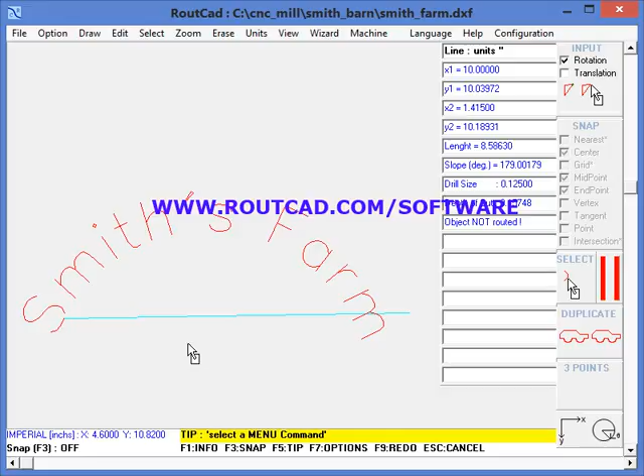There is a line over here that we don't need. We're going to erase it. We go to Erase Object and we erase that line.

Now we can see this is missing a little bit of a line over here, so we're going to zoom into that area and we will go to Draw Line.

We'll be using 2-point and the mouse, and we're going to press F3 to enable the snap, and we have endpoint selected. So we're going to go from this point to that point to correct the mistake.

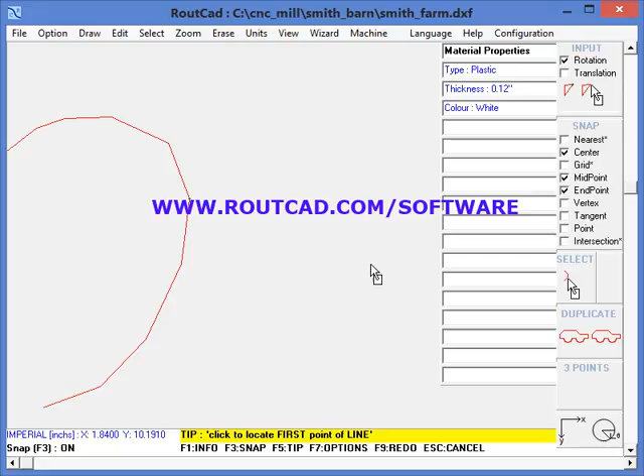Now we zoom out again. Now this is all good. We got our Smith's Farm over there.

This is perfect, but we wish to add a little symbol of a horse in the middle. To do that, we have already drawn in RoutCAD a small horse, and we will be bringing it back into that drawing. It's quite easy.

We're going to go to File and we're going to merge that horse that we did before, so we're going to click on Open. Now it is not important if we merge before the first route or after, because we have not yet defined the routing information in this drawing.

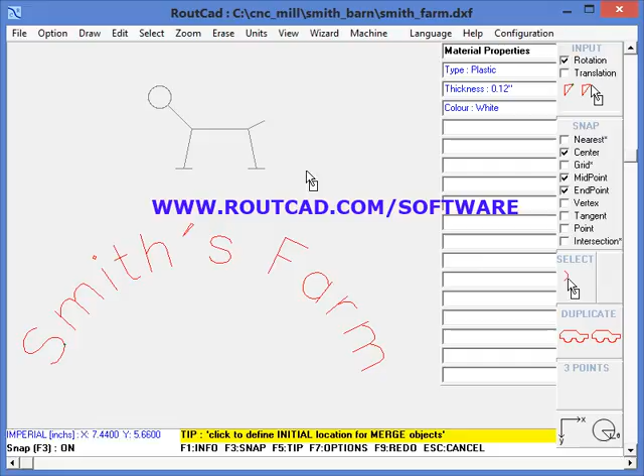So we're just going to click on Yes. This is where it's putting the horse. What we need to do: now the horse is gray, which means that location is temporary.

So what we'll do is use the mouse and disable the snap. We're going to click a first point and drag that little horse in the middle somewhere.

Now we are quite happy with this, but we want to add an extra feature to that horse. We would like to add a small seat over here.

We can just go to Draw Line, and we're going to press F3 to enable the snap, and we will be drawing a line that goes in that direction.

Now to be more accurate, we could have used the snap or the grid, but this is just a quick thing, so we will not be using the snap or the grid.

We're just going to snap to the middle, drag the mouse to go in a vertical line, press F3 to disable the snap, and then click again.

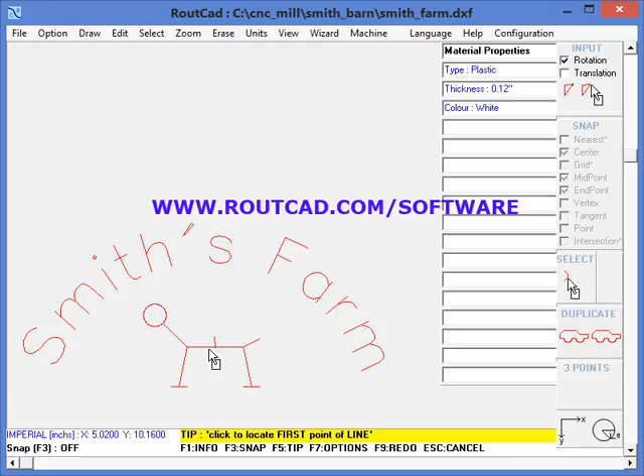So now we made a seat. It is not straight, but as I said, we're not trying to do something accurate for this particular thing. We just want to do a quick thing.

But if we wish to do something accurate, let's do it. We can go to the grid, and we're going to increase the grid to, let's say, 0.5 inch.

Now, what we can do is move that drawing in such a way to put it at a grid point to allow us to draw more accurately.

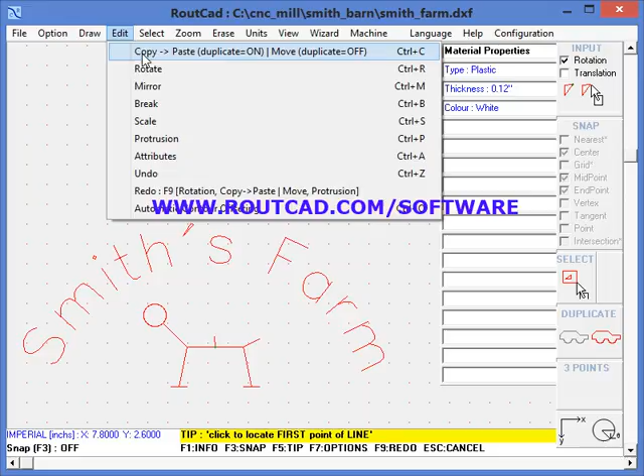Let's do that. What we do is cancel the duplicate, so we will not be duplicating what we are doing. We're going to select window, and we're going to copy. We're going to copy all of that, so we're going to click on Copy and select a window to copy.

Now we're going to press F3 to enable the snap again, and we're going to select the endpoint of this line. Now we're going to go back and put on grid, and we're going to put it at a grid point. So what we've effectively done is put one endpoint of that horse at the grid point to allow us to draw more accurately using the grid. It's quite a simple thing.

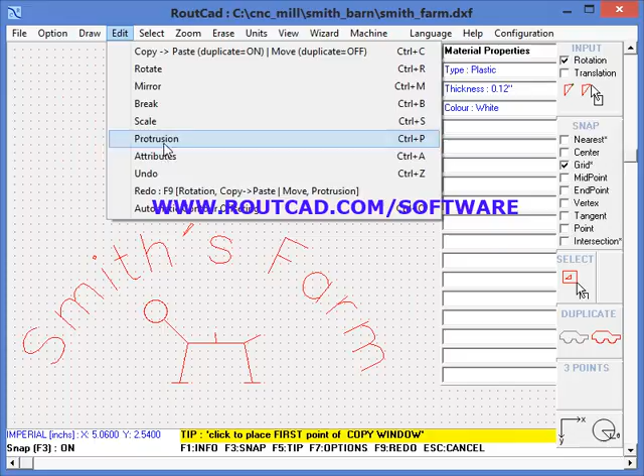We could even increase or decrease the grid if we wish to make it a little bit smaller. Now we're going to erase what we did before, erase object. And we're going to draw another line, but this time using the grid, which allows us to be a little bit more accurate. So we're going to go straight this way, and then we're going to make a seat like that.

Quite simple thing. Okay, now we have made the sign we were looking for, and we are happy with it. So the next step is to make sure we define what type of material we want to machine this out of. We will machine this out of plastic.

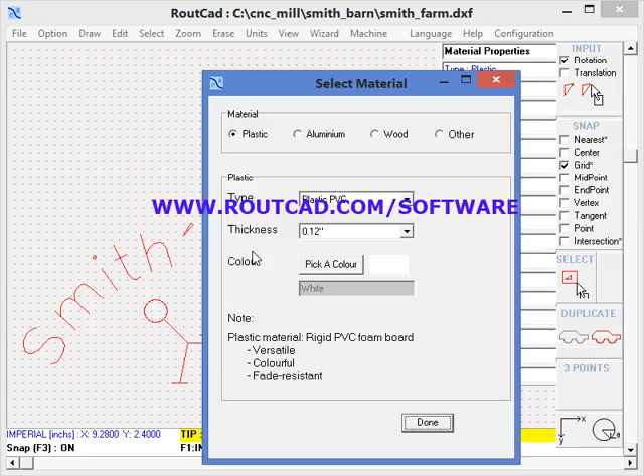Material selection, we're going to get plastic, 0.12 inch thick. That's good. Now we're going to make sure our depth of cut is defined properly. We have depth of cut 0.157, and our tool diameter is 1/8 of an inch. So everything seems to be good.

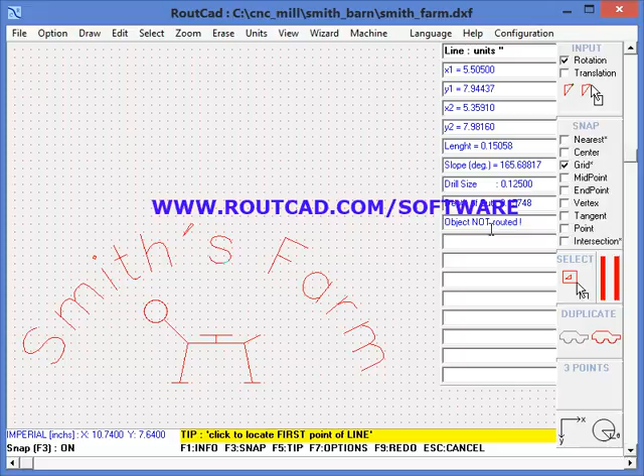Now we're going to make sure this drawing has the proper attributes, and we can see that the depth of cut is not the correct one. Here it's okay, 0.15, but here it's not okay. So all we need to do is edit attributes and select the whole thing. Now all the attributes have been changed.

Now we are ready to route or machine this. We could machine it one element at a time, or define the machining sequence all at once. To be more accurate, it's better to go one at a time, and then do the letters and everything like that. But in this case we want to do something quickly, so we will define the machining sequence all together. All we have to do is go to machine, and select route semi-automatic.

And we have the window selected already. So now all we need to do is select all of that, and then RoutCAD will machine it for us. Now, mind you, now it has been routed, so all that we see will be machined by the CNC, and the width of this object represents the 1/8 inch tool diameter.

Now, as I said, this was a quick way to machine it, but to be more accurate, we can select one element at a time, or select one element first and then pick a window, to machine it in a better way if we wish. Now, obviously, what is in green is the first element to be machined, and everything in red is the subsequent element.

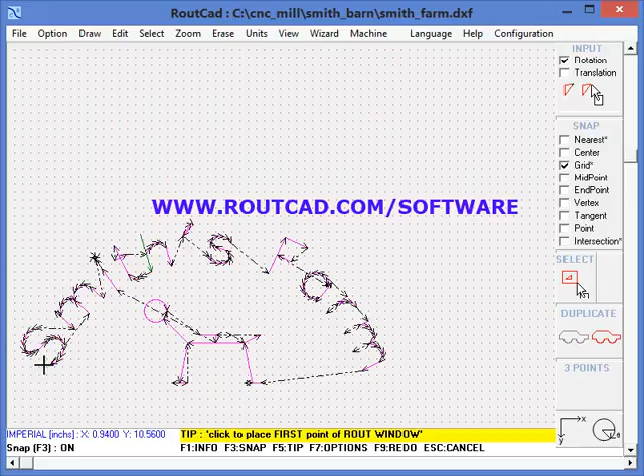Now, if we go to view, display, route arrow, we can see the machining sequence in all the directions involved in the machining. So we're going to go back and view show route.

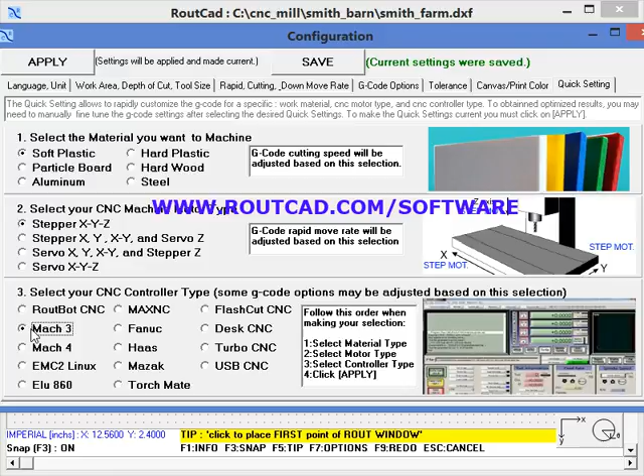Last step is to basically export this to G-code. So we go in the configuration panel. In our case we want to do something quick, so we're going to pick a soft plastic because that's what we're machining out. We have 3 stepper motors, one on each axis, and we're using Mach 3. So then we click on apply, and we go to machine and export G-code for CNC milling.

Then there will be 2 files saved. The first file is going to be a .rs, which is a native RoutCAD format used with RoutBot CNC. And the second format is the G-code, which is used by so many different controllers: RoutBot CNC, Mach 3, Mach 4. And then we save that to G-code.

Now, the very last step will be to bring that G-code into Mach 3 or RoutBot CNC and perform the machining of that sign, which literally took us a minute to do.